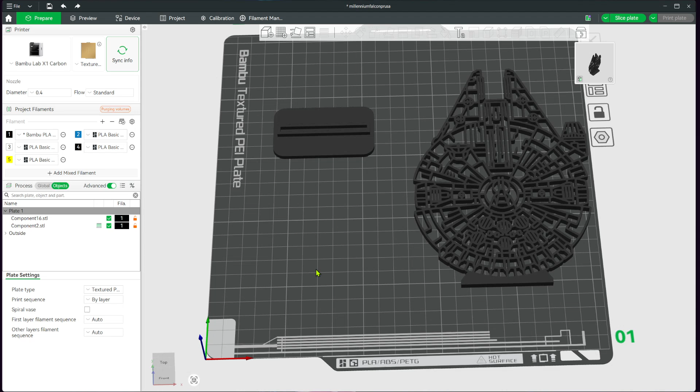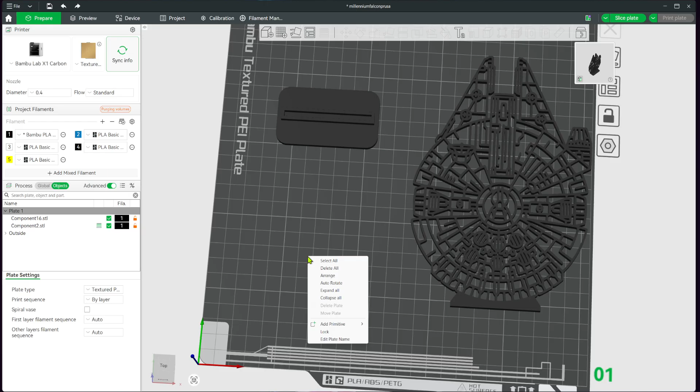I will show you here on this example. Let's say we want a solid hole here in the middle of this model. So what we are going to do is right click your model and we can place here add part.

Now I will select here a cylinder because I have a circle in the middle, so I will use that one, but you can use whatever your hole is. If you have a more cubic hole, then use cube. Now I will use cylinder.

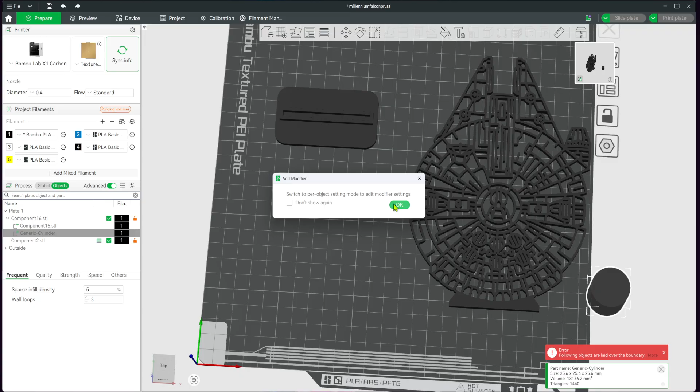Now I will move it right here to see. Now what we are going to do is basically scale it a little bit. So I will place it. You just press on the model and then drag it to your desired destination.

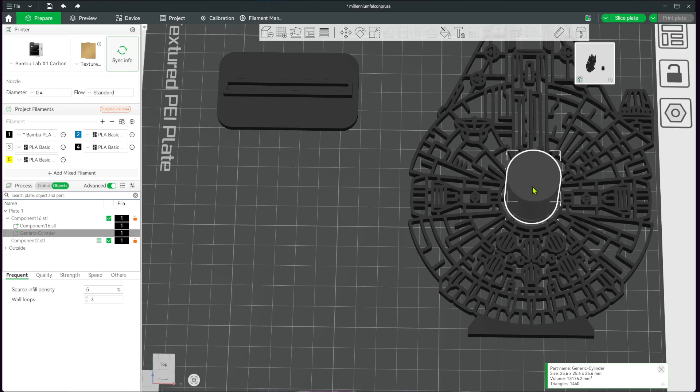Now I will try to make it really close to this one, so I will resize it a little bit. You can use the scale tool, which is right here. You can also press the S key on your keyboard.

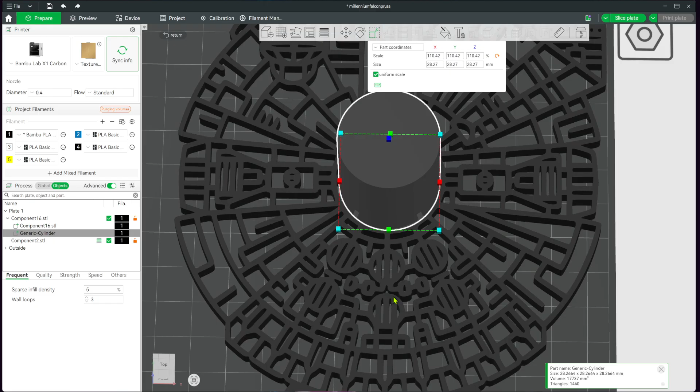Now you will see here scale size in percentages and millimeters. I will not type in the numbers, I will just use here and drag it a little bit like so. And then I will check everything. So I need that one.

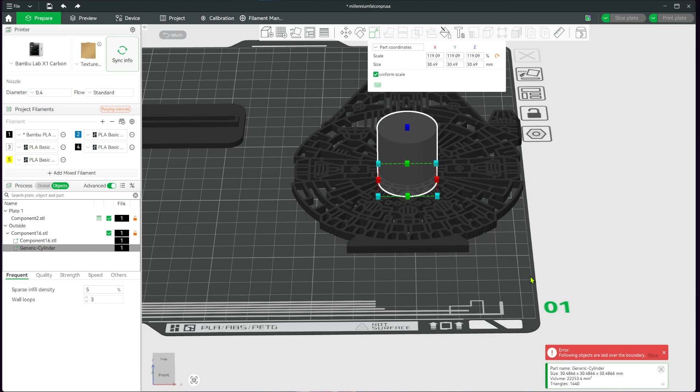So I will just place it right now as it should be, as I would like it to be. Like that, I think that's great. Now I need to go back up and lower it a little bit, because my model is not that big, so I will just drag it down. Let's say just something like that.

Now what we are going to do is simply press slice here at the top right corner. As long as your new shape completely fills the empty gap and touches the inside walls, Bambu Studio will automatically meld them together into one solid piece when you click slice.

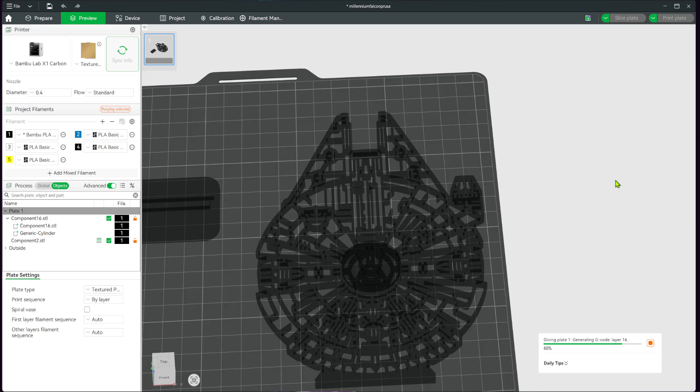Now I think I didn't do it perfectly, so let's see what will happen. Yeah, as you can see, it's not that super great, but for showing you how it can be, I think it's solid.